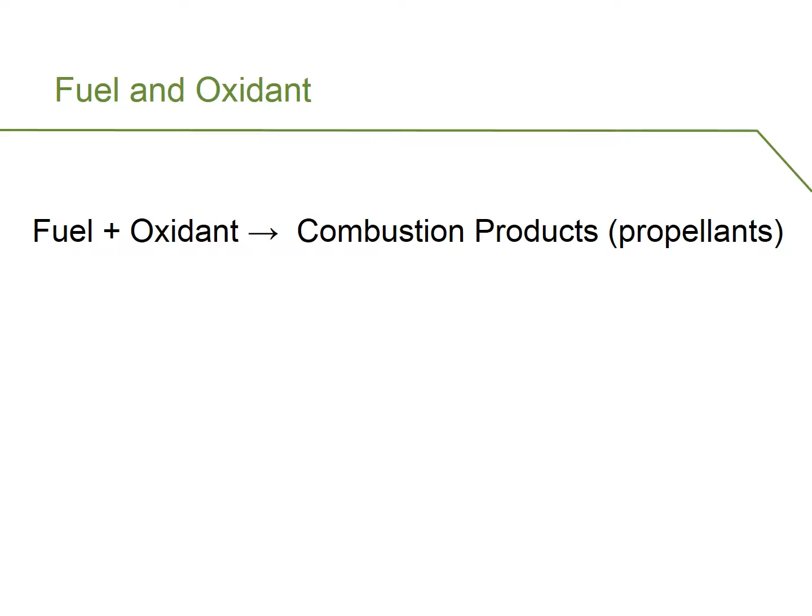When we talk about fuel for a rocket, what we're actually talking about is not just the fuel, but the fuel and the oxidant. So the fuel and the oxidant together combust to form the combustion products, which are also the propellants. So the combustion products leave the rocket engine at high speed, thus creating a reaction which propels the rocket forward. Remember what we said before, that a rocket engine doesn't actually breathe in any air. It has to take all its fuel and all its oxidant with it. But that also means that the oxidant doesn't actually have to be oxygen. We can use other types of oxidant as well, as we shall see.

So what do we want from our fuel and oxidant? Well, we've mentioned the importance of high specific impulse. A large specific impulse will tend to ensure that our rocket has a large range and payload without having to use a large mass of fuel to achieve that. But there are other characteristics that we'd like from our fuel and oxidant. It will be more convenient if it comes as a liquid, or if it is a gas like, say, hydrogen, we'd want to be able to liquefy it relatively easily.

Besides that, it's important to think about safety. Needless to say, rockets and rocket fuels might be dangerous. So some fuels might be less dangerous than others. And are the combustion products of the rocket fuel and oxidant in themselves harmful, either to human beings, or could they be harmful to the environment?

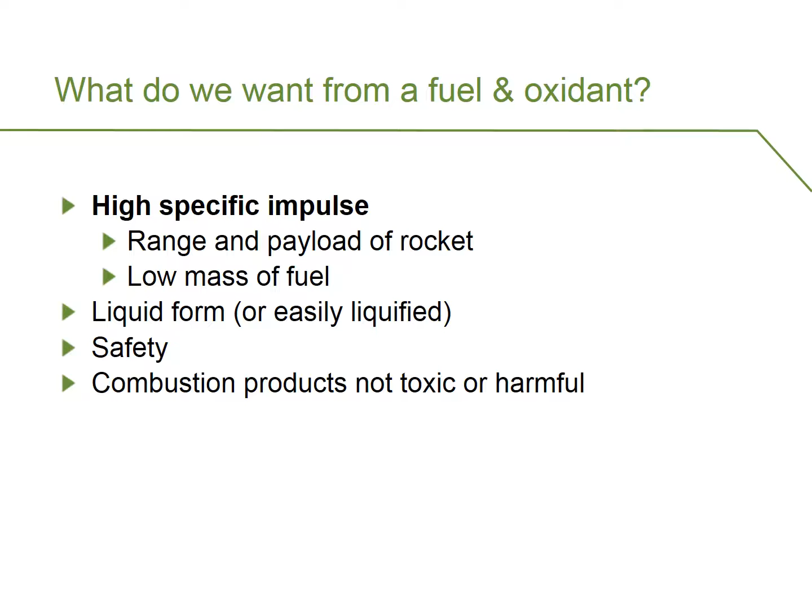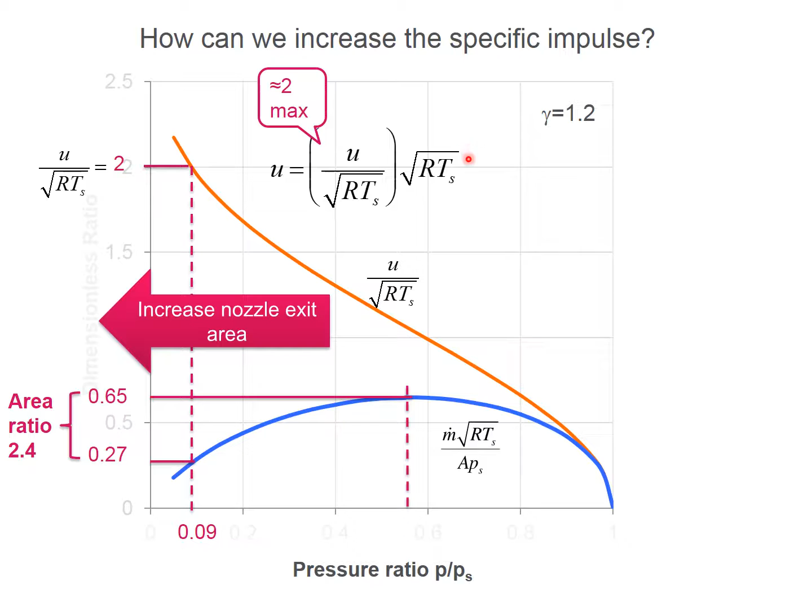So we could say that the exit velocity is equal to the velocity parameter times the denominator term in the velocity parameter, square root of RTs, which is in itself a constant. So there's 2 things we can actually do. Increase the nozzle exit area, which I just mentioned, in order to increase the velocity parameter, but we're limited in how far we can go. Let's say 2 might be a practical maximum, or we can increase this square root of RTs, and this is where the choice of fuel becomes very important.

So we could choose a fuel that gives a very high combustion temperature, Ts, or we could increase the gas constant. How can we do that? Well, this gas constant R is not the universal gas constant, it's the gas constant for the combustion products of the particular fuel and oxidant that we're using. So the value of R will be related to the universal gas constant divided by the molar mass of the combustion products. Therefore, if we choose combustion products of low molar mass, we'll get a higher value of R, a higher value of exit velocity, and a higher specific impulse. So these are two things that we need to look at when we're choosing fuels for high performance. So now let's look at some specific fuels that we could use.

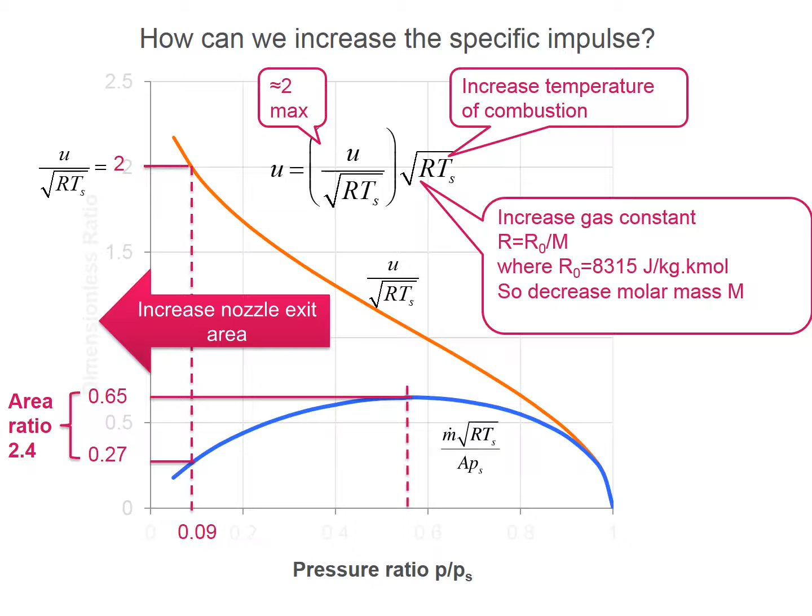So hydrogen. Hydrogen is a very light gas, so it might be convenient as a rocket fuel. It burns with oxygen to form water, which is non-toxic and non-harmful. What else can we say about hydrogen-oxygen as a choice of rocket fuel and oxidant?

Well, it has a fairly high combustion temperature of about 3000 Kelvin. The molar mass of the products is 18 kilograms per kilomole. When we put those values into this relation, we work out a specific impulse, ignoring the pressure term in the impulse, of 2,350 meters per second.

What else? There's also some disadvantages to this fuel. Hydrogen is a relatively expensive fuel, and it's troublesome to liquefy and store. So we have to cool down hydrogen to below its critical temperature of about 30 Kelvin in order to liquefy it. It can't just be liquefied by applying pressure.

It's a cryogenic liquid. Even when we manage to liquefy it, its density is actually quite low, 71 kilograms per cubic meter. If you compare that to water, water has a density of 1,000 kilograms per cubic meter. So even in liquefied form, hydrogen is going to be bulky.

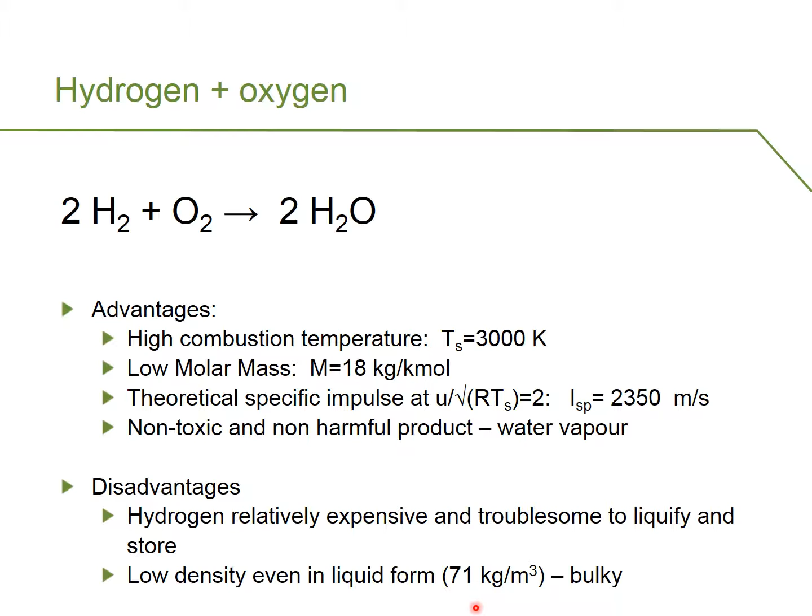We could also use hydrogen with a different oxidant. What about if we used fluorine? So that actually gives us a higher combustion temperature, TS equals 3,900 Kelvin. Its molar mass of the products is slightly higher, but that's compensated by the higher combustion temperature, and we get a specific impulse of 2,550 meters per second, so slightly higher than with hydrogen and oxygen.

We have the same difficulty that hydrogen is going to be a relatively expensive fuel, troublesome to liquefy and store. But not only that, in this case, fluorine is a highly toxic gas. So it's a toxic gas that goes into the engine, and hydrogen fluoride is also toxic and harmful. It's a very powerful acid, even capable of corroding glass. So this is not a very popular choice of rocket fuel, but I wanted to show you it to illustrate how we could use other oxidants.

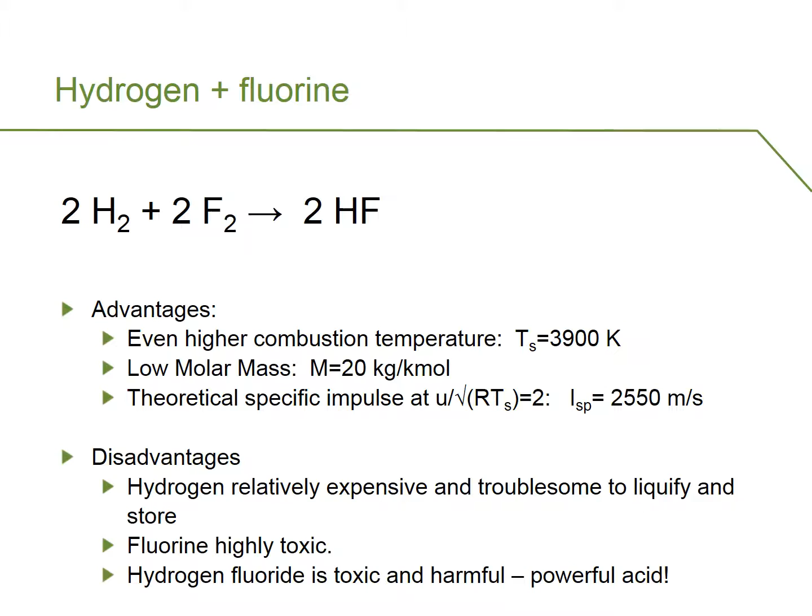The combustion temperature is again high, but because of the high molar mass, the specific impulse is a little bit lower in this case, just below 2,000 meters per second. Its products are non-toxic in principle. Kerosene is an affordable liquid. Evidently, it's regularly used in jet aircraft, implying that it's generally available and relatively safe to store and handle.

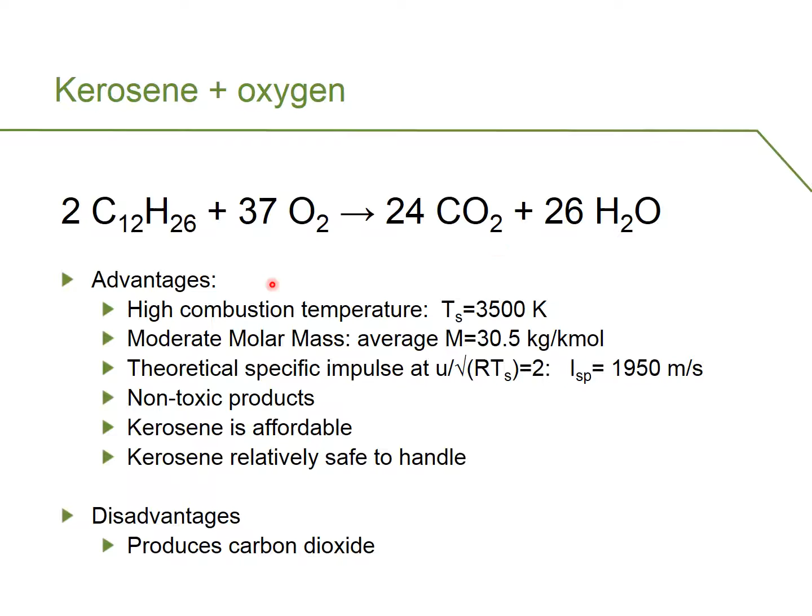If you go to the problem sheet, there's an exercise for you to work out these results for methane and oxygen, methane being another fuel that we could use. So this is all approximate. For a start, I've made a general assumption that the velocity parameter is 2. It doesn't have to be exactly 2, it could be slightly higher, it could be slightly lower.

More importantly, what I haven't taken into account is the fact that the molar mass of the products could actually be lower because of dissociation. So when these gases combust, you don't actually get pure water vapor. You get water vapor, some of which is dissociated into radicals like hydrogen radicals, hydroxyl radicals, or back into the reactants themselves.

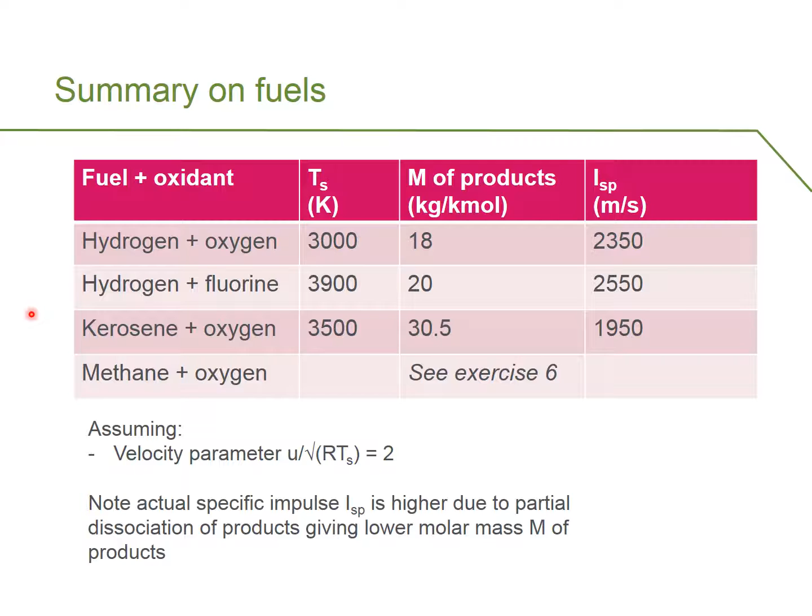So this dissociation means that we actually get a lower molar mass, and the specific impulse we really get is significantly higher. But the dissociation calculations are relatively complex and we're not going to do those. So I've just used these relatively simple calculations to illustrate how these sorts of fuels are likely to compare in terms of their ordering. So that completes our comparison of different fuels for use in rocket engines.

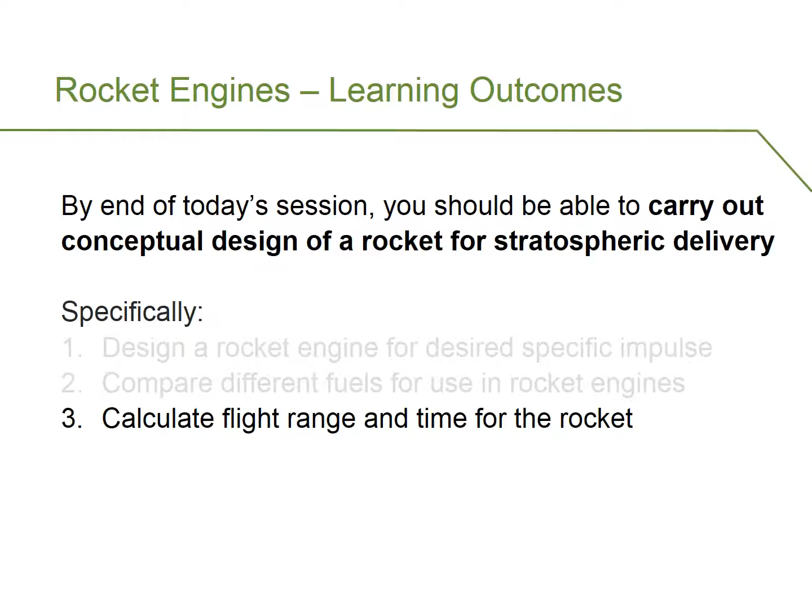In the third and final part of the lecture, we're going to use the results that we've been obtaining in these first two parts to calculate flight range and time for a practical rocket as we could use for delivery of aerosol forming substances to the stratosphere.